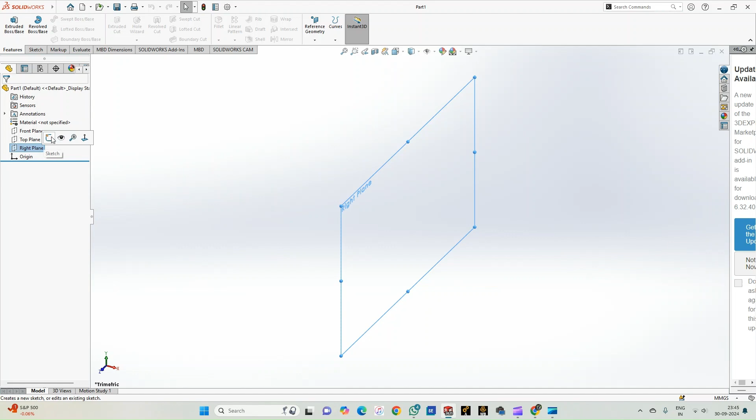So now we'll go for the sketching mode. And to begin with the sketching, we need to select one of the planes. So we shall select the right plane and click on the sketch option here. So now we have moved on to the sketching mode. So in the sketching mode, we shall start creating the inner race.

So the inner race is something which is opposite to the outer race that we saw in the previous video, wherein the inner race will be having the race, that is the revolved cutout, on its outer periphery. So this will be getting assembled into the outer race. So with this much of understanding of the part, we shall go for sketching it.

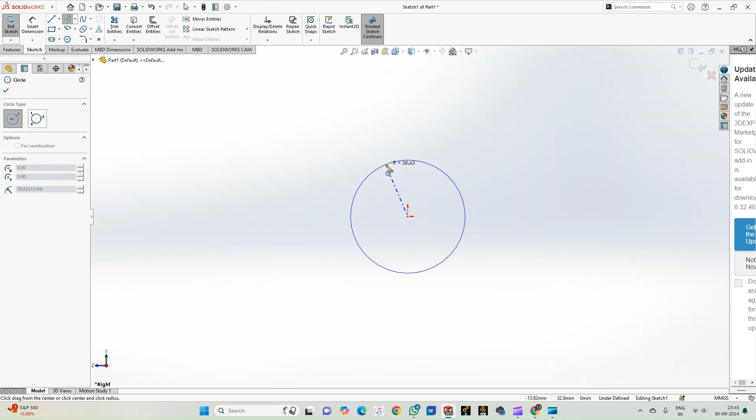So basically even this will also appear as if it is a circular tube. So for that, let us select the circle option and ensure we are in the MMGS mode. So we shall draw two circles which are concentric, that means which are having the same center point.

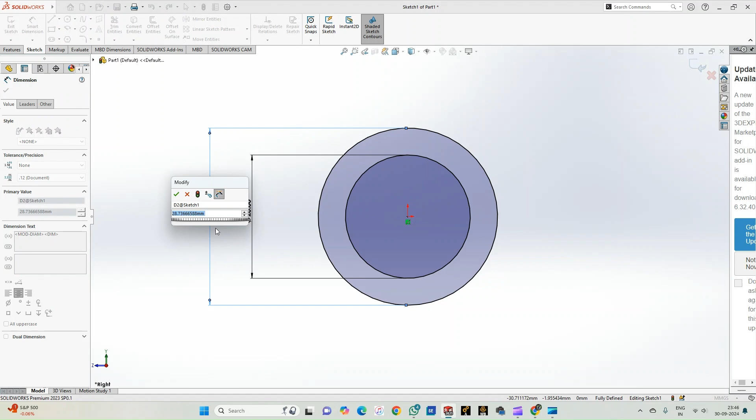So now let us switch over to the smart dimension and mention the dimension of the inner circle as 20 diameter, and then the outer circle shall have a diameter of 30.25 mm. So with this, we have completed the first part of the inner race.

So just come out of the dimension mode, exit the sketch, and let us go for the features. Ensure sketch one is selected. Select the extruded boss, and in the direction, select the mid plane option, and ensure we are going to assign the thickness of the extrusion as 15 and click OK.

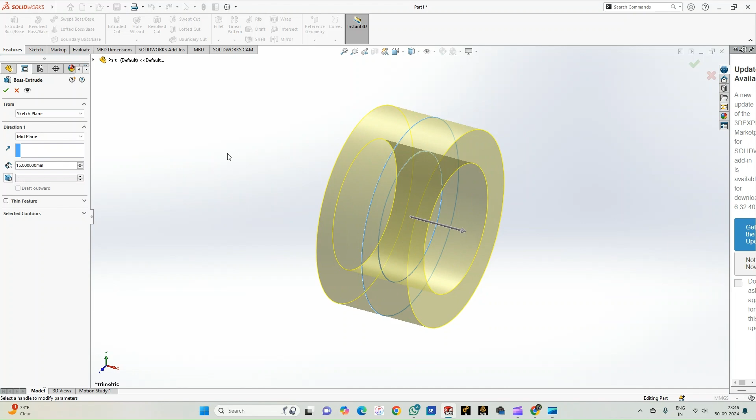So if you want to edit any feature, suppose in the sketch, you can use the sketch from the tree and go for edit sketch. So here you'll be having the provision to do the additions in the sketch. So once you have done the additions, click on exit sketch.

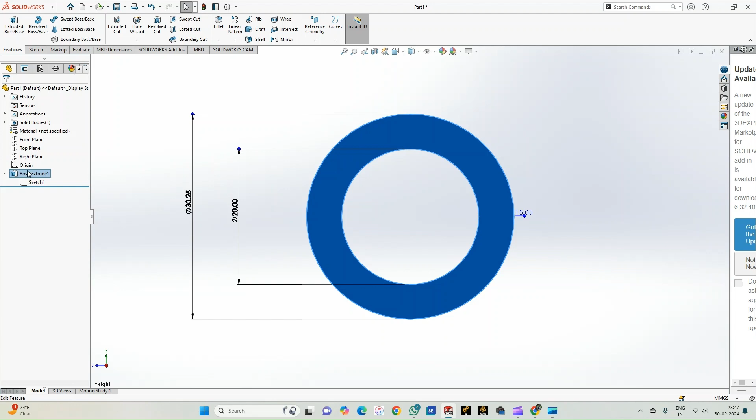So now if you wanted any additions in the features, then select the feature in the tree and then click on edit feature. So you'll be having this option. So now this completes the first part of creating the inner race part.

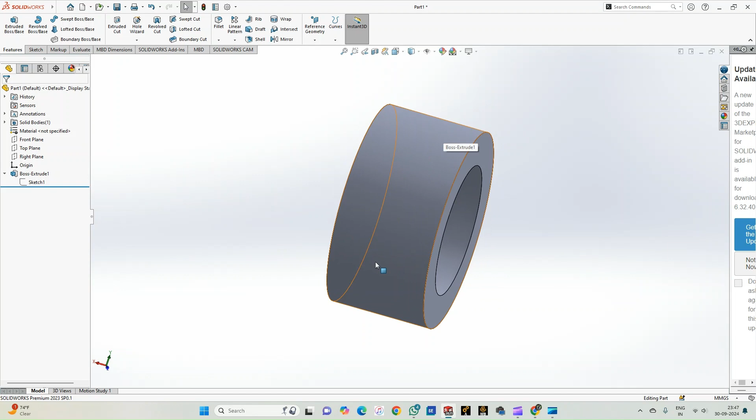So now we'll see how to create the track, the race, on this outer periphery of the inner race. So for that, let us select the front plane and go for the sketch mode. So once you're in the sketch mode, the reference coordinate system is visible here. So this is the reference mode. So now let us switch over to the wireframe mode of the drawing.

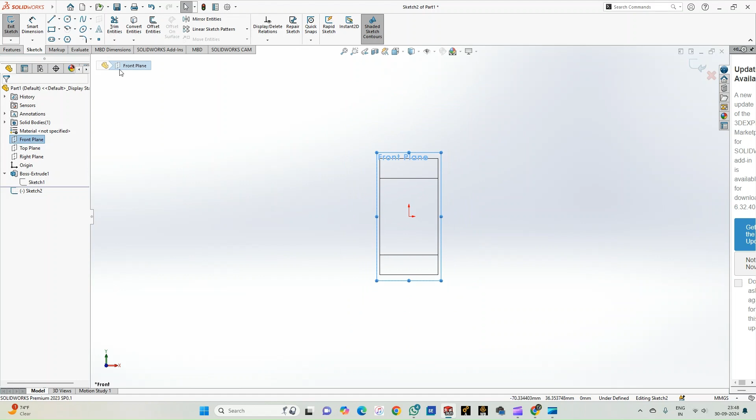So now we shall begin with drawing a circle. So simply draw a circle of any arbitrary diameter. Click OK. Let's come out of the circle option. Select the center point of the circle and also the origin of the coordinate system and select vertical. So this constraint is very important for us.

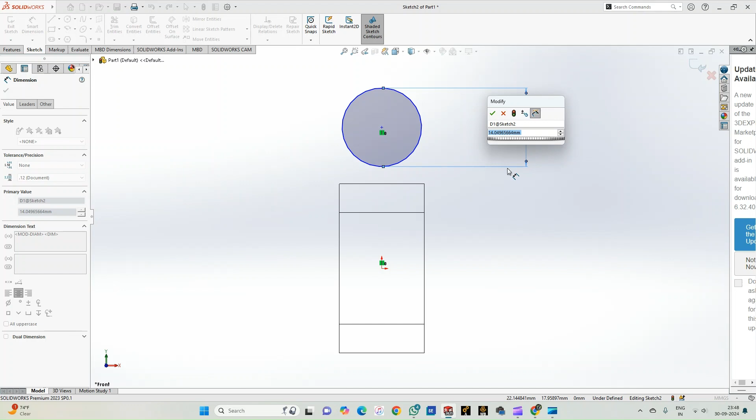Click OK. So now we shall go for creating the diameter of required dimension. So here let us assign the diameter of this circle as 10.05 mm. Click OK. So now still you can see that it is underdefined, and the movement of the circle is arrested in the x direction and it is able to move only in the y direction.

But in order to arrest its movement in the y direction, we require one more important parameter to make it fully defined.

So that is, select the circle and then the outermost edge of this inner race and then assign the distance. So here the distance will be equal to, so again just give it as a random distance like this, 10.07. So now go for leader option. So select the minimum condition.

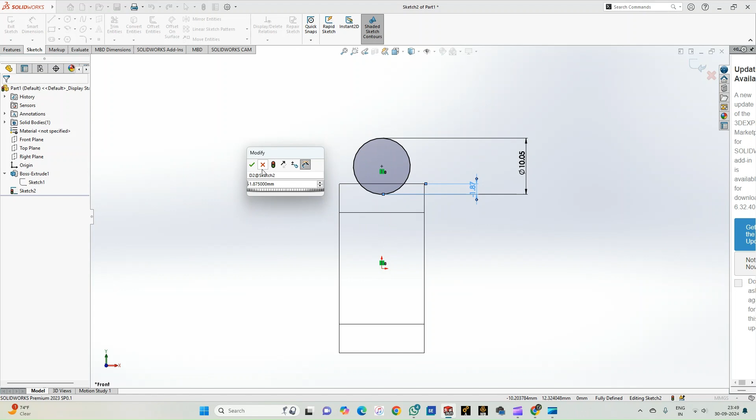So now you can just see that it is taking this part of the circle. So enter the value as 1.875 mm and click enter. Again select this and then reverse the sense of the dimension must be selected. Only then the circle is going to interfere with the outer diameter of the inner race, and then it is able to create a revolved cutout.

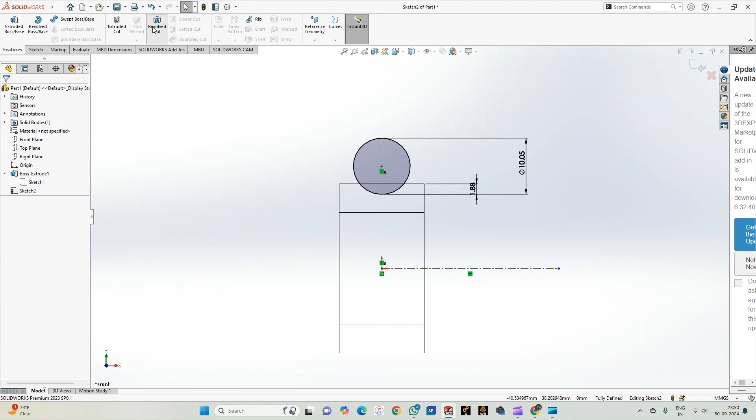So again, let us select the line option, select for construction. So next, draw a line parallel to the x-axis, and then just come out of it. So this is just for the reference purpose. So now we'll go for the features option, select the revolved cut. So by default, it has selected the line 2 as the axis, and this is the parameter for revolved cut. So now just click OK, and now you can just see that the cut is prepared.

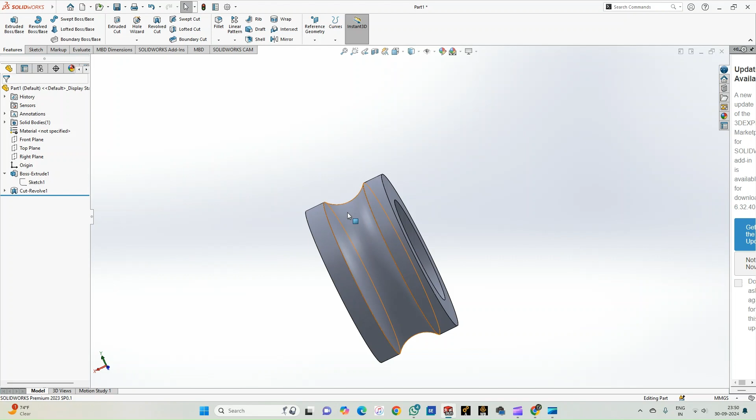So we'll just switch over from the wireframe to the solid model. So you can see that the race has been created on the outer diameter or the outer periphery of the inner race part. So now we shall go for assigning the material. So in this tree, select the material option and then select edit material, and let us assign the material of AISI 304 and click on apply.

So you can just see that all the pertinent data like the elastic modulus, the Poisson's ratio, shear modulus, density is all detailed here. So if you want to edit any of this particular data, go for configuration and you can edit here. And also here you have to ensure that the units is matching with the units in which you're going to create the sketch. So it is SI in Newton per mm square, that is megapascals. So just click apply, click close.

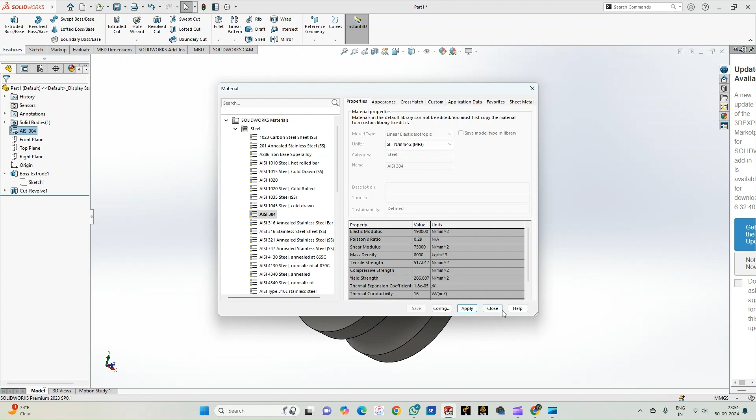So now you can just see that the appearance has changed. So the user library in the software has defined this particular color for the material. So this is taking the material color of this type once you have assigned the material of AISI 304.

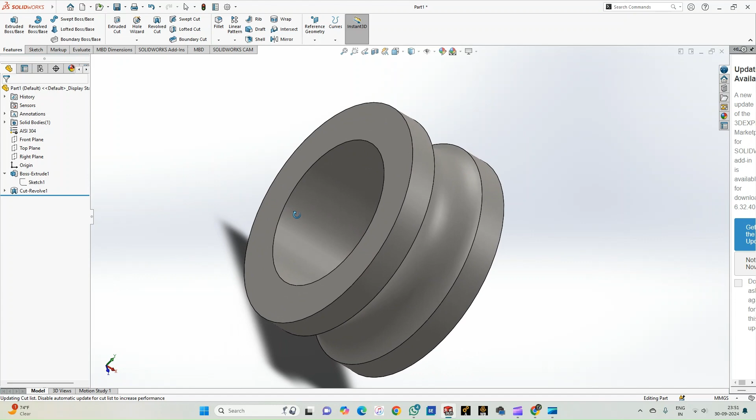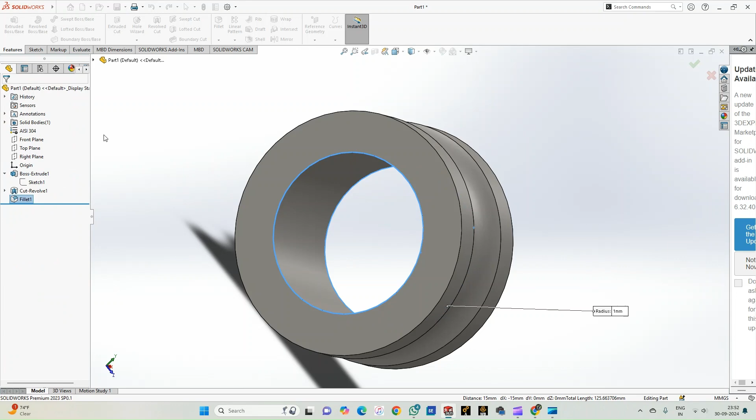So now we need to ensure that we are going to create a fillet on this particular part. So we shall just select this edge, or select this particular curve, and then let us go for fillet option, and then let us create a fillet on these two edges of 1 mm. So click OK. So now you can just see that the fillet has been created.

So similarly, even for the outer race, select the outermost edges on both the ends and then create a fillet of 1 mm. So this part was missed in the previous video. So just create a fillet apart from creating the race and the grooves. So here we are not creating any grooves for the inner race. So it is just the race track on the outer diameter and the fillet for these two edges that we have created. So with this, we complete the creation of the inner race part.

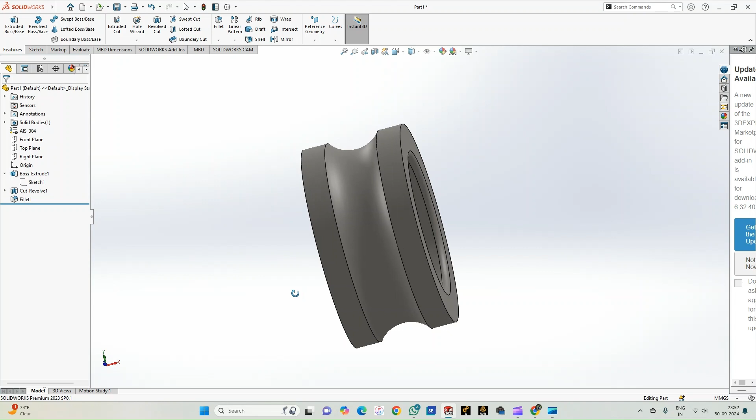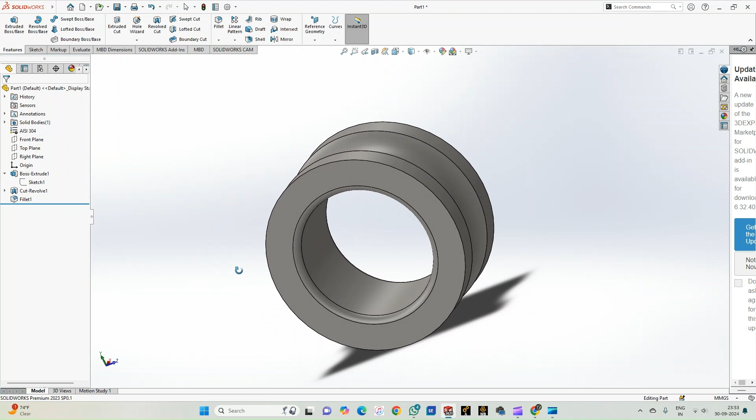So we have assigned the material of AISI 304, which is seen here, and also we have created the two concentric circles, created the extrusion, and then we have gone for creating this race, and then we have also created a fillet. So these are the important features of the inner race part. So with this, we complete the video of creating the part model of inner race with the SolidWorks software.